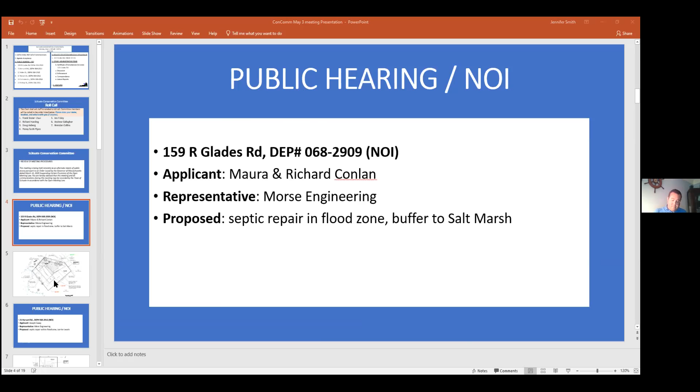So who do we have for that? Greg Morse. Good evening. For the record, this is Gregory Morse, registered engineer, Morse Engineering. I'm representing the property owner and applicant, Maura and Richard Conlan.

This is a septic system upgrade project. The property is located at 159R Glades Road. Looking at the plan here on the screen, the property line is shown as the bold black line. At the bottom left of the screen in blue is highlighted, that's the edge of the salt marsh. The 100-foot buffer zone is the highlighted green line at the top right of the page. You'll notice that the entire lot is within the 100-foot buffer zone to the salt marsh.

It's also in an area of land subject to coastal storm flowage. It's a FEMA zone at elevation 15. For reference, the topography at this site is approximately elevation 8 to elevation 9. There's an existing home at the property. That home is serviced by a septic system behind the house, which failed a Title V inspection.

The proposal here is to put a new system of equal capacity, which is 3 bedrooms capacity, but to locate it in the front yard. This is an advanced treatment system, so it's not just a typical septic tank. This is a Hoot aerobic treatment tank, a pump chamber, and then a geoflow drip dispersal system.

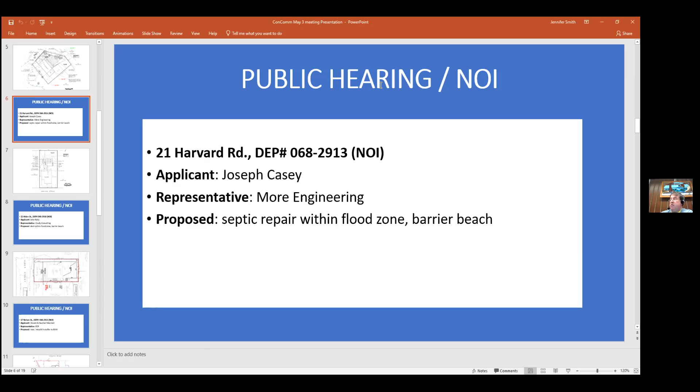Okay, who do we have? Greg again. For the record, Gregory Morse, registered engineer, Morse Engineering. This is a septic system repair project at 21 Harvard Road, located in the Humarock section of town. The property line on this plan is the black bold line. It's approximately a 5,000 square foot lot. At the front of the lot there's an existing 4-bedroom single-family home. Harvard Road is located at the bottom of the page. This property is located in land subject to coastal storm flowage, a FEMA zone elevation 13, and it's also located on the barrier beach.

We're replacing the septic system with a new septic system in the backyard. It consists of a 1,500 gallon septic tank, a distribution box, and a series of infiltrator chambers. This is a 4-bedroom design; it's a 4-bedroom house at the property. It meets all Title V requirements. The Board of Health has not approved this yet, but we expect approval imminently. Where this is located is bare sand, and it would go back in its finished condition as bare sand. There's no vegetation removal associated with this septic system. Turn it over to you.

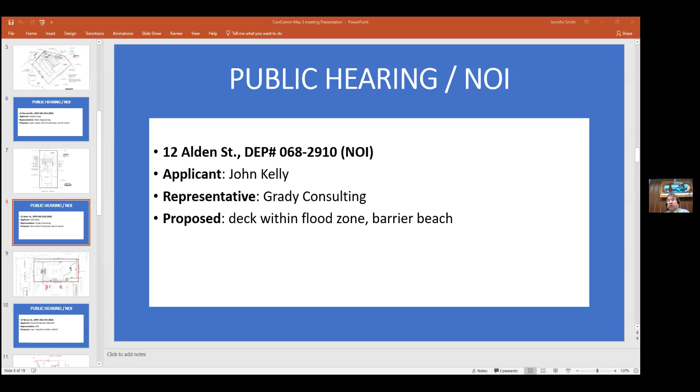I'm here representing the applicants for this proposed deck project located at 12 Alden Street. Currently this site consists of an existing single-family house, with a deck to the front and right-hand side, a septic system and tank in front, and a leaching field in the rear. The site is located in a FEMA flood zone AE elevation 14, and is also located in the barrier beach.

What the applicant would like to do is construct a proposed deck around all four sides of the house and into the rear of the property. The deck consists of 12 concrete precast footings, and we are proposing a silt fence erosion control around the perimeter of the property. I'd be happy to answer any questions the commission may have.

Penny asked if the deck is the big section in the back or the front. It's in the back. She noted they won't have any lawn to mow and said she doesn't have a problem with it, though it takes up the whole lot. Someone noted it's all sand, and that's what they want.

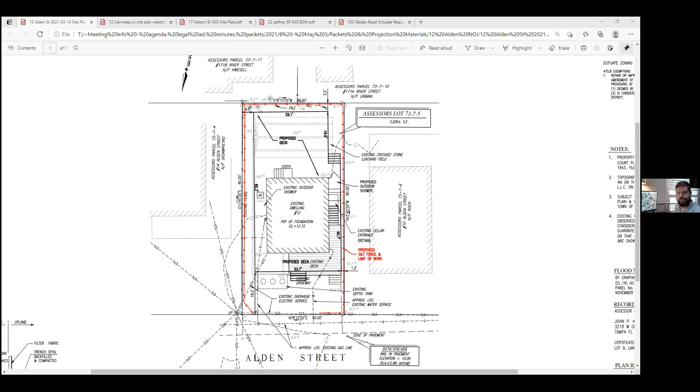Thank you. Number 7, 17 Nelson Street. On May 3rd at 5:30 PM, the Town Hall, Scituate Conservation Commission will hold a wetlands hearing under Chapter 131, Section 40 of Massachusetts General Law and Section 30700 Town Scituate Code of Bylaws regarding the application of Steven and Heather Marshall for work related to razing and rebuilding and associated landscaping of a dwelling at 17 Nelson Street, Scituate. Abutters and other interested parties are invited to attend. Information on access to virtual meetings is available on the posted town website.

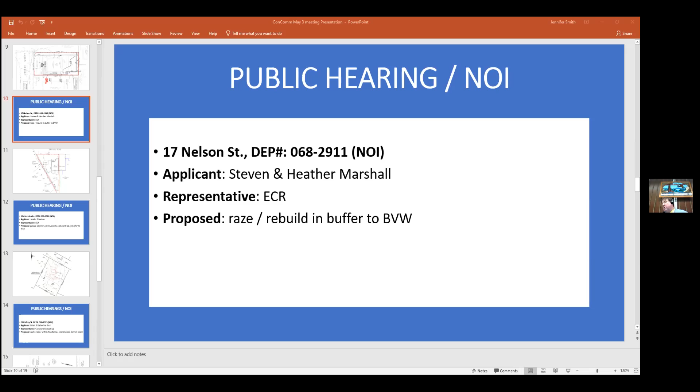Brad Holmes with ECR here for the notice of intent for 17 Nelson Road. A notice has been submitted by Steven and Heather Marshall for their property, which contains a single family home, a maintained yard, and a studio that just received a certificate of compliance. What we're looking to do this evening is a proposed rebuild of the existing single family home, to remove the house and rebuild it in generally the same footprint that exists now.

The work is within the 100-foot buffer zone. A small portion of the work is within the 50-foot buffer zone; however, that is a result of the existing conditions of the house as it stands today. We will install erosion controls to surround the work area, and everything will be located within the buffer zone. Other than that, I'll open it up for your questions.

Okay, thanks. Jen? I had a feeling you were coming this way. It sounds great. I love that it's not getting any bigger.

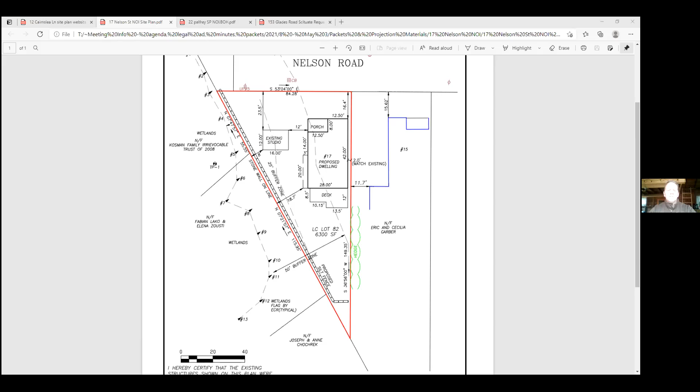On May 3rd, 2021, 5:30 at Town Hall, Scituate Conservation Commission will hold a wetland hearing under Chapter 131, Section 40 of the Massachusetts General Laws, and Section 30700 Town of Scituate Code of Bylaws regarding the application of Jennifer Sheehan for work related to building a garage, addition, decks, and porch dwelling at 12 Cairnslea Lane, Scituate. Abutters and other interested parties are invited to attend. Information to access the virtual meeting will be available on the agenda posted on the town website.

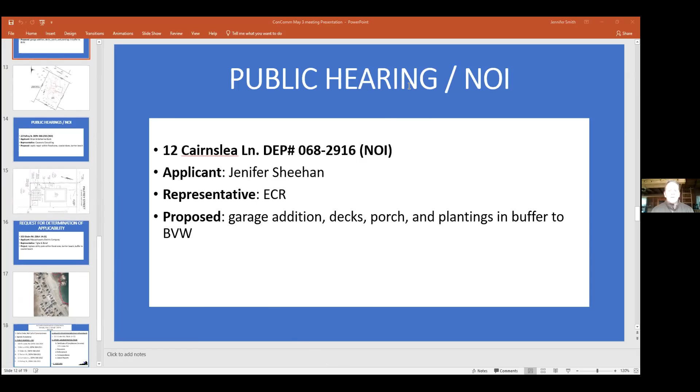Good evening, members of the commission. Brad Holmes with ECR here for Jennifer Sheehan for her property at 12 Cairnslea Lane. We've submitted a notice of intent for a single-family home improvement project. The project involves a proposed garage addition over existing structures, and a proposed deck that would wrap around the back of the house in addition. The work is within the buffer zone bordering vegetative wetlands. We're not within flood zones or other resource areas, so it is within the buffer zone.

The work occurs within existing structures and existing paved driveways and existing lawn. If possible, I'd put together a mitigation plan that might be a little easier for the commission to see the project. But in general, what we're looking to do is work generally over existing structures or paved driveway.

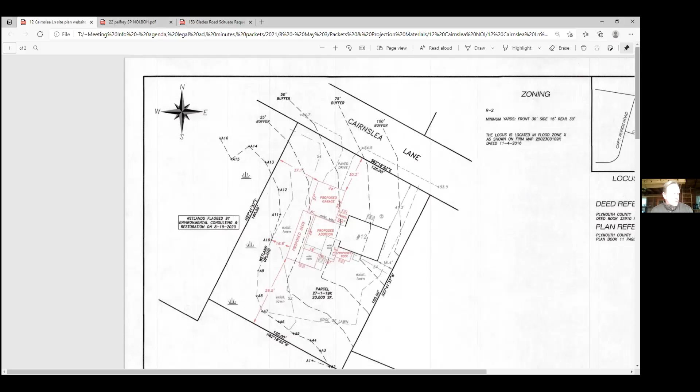There is approximately 660 square feet of deck and garage proposal that's over the existing lawn. So what we're proposing to do is provide mitigation with mitigation plantings at a greater than 1-to-1 ratio, so we'll propose 825 square feet of vegetative buffer to remove lawn.

Well, thank you very much. And revegetate that so that we have a vegetative buffer strip where there really is just maintained lawn. So you can see the area in brown is the shaded area of new project footprint that falls outside of existing structure or driveway. However, it is over an existing lawn. We know the commission looks to require a 50-foot vegetative buffer strip with no work in that area. However, this area is already existing lawn and maintained, so we're proposing the mitigation to revegetate and create a vegetative buffer. That image has a step-by-step process on creating that mitigation plan and proposing a vegetative buffer.

So I'll open it up for questions and discuss further. Okay.

Andy? I don't think I have questions. I get the project, I mean it's significant work in the 50. So I'll let other commissioners weigh in, but I don't have questions. It's a pretty imposing project.

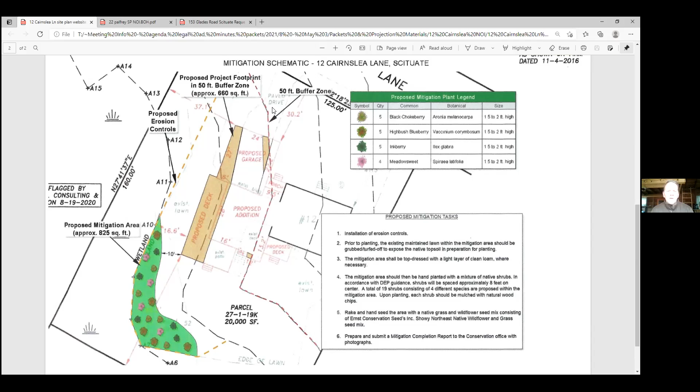Sure, so the access is right from 12 Cairnslea Lane. If you can see how there's a brown strip on either side of the proposed garage, that's the existing driveway leading into the existing garage and house. The proposed garage, majority of it is located over the existing driveway. You can see the slivers that are proposed over lawn. And then an addition would be proposed over the structure that's there. The proposed deck, the shaded in brown, is new structure within your 50-foot buffer zone.

We're looking to mitigate that. If it's a 2-to-1 ratio, we can improve and increase the mitigation area, if that's what the commission would like. I would, and I bet Penny will agree with me. Yes, but other than that, I'm good for now.

Doug: So it's a proposed addition on a full foundation, at least a 4-foot frost wall. There's existing structure there now. Okay, so it's over—that's the addition, the light dotted line is an existing structure. And then in red, you've got the proposed addition that goes over. Correct, so that's going to be ripped down and then you replace that.

So the increase in area is the difference between those two, shaded in brown. Plus the garage - I'm trying to look at two plans. The garage would be new. Well, it looks like, if I'm looking at least, there's a dotted line.

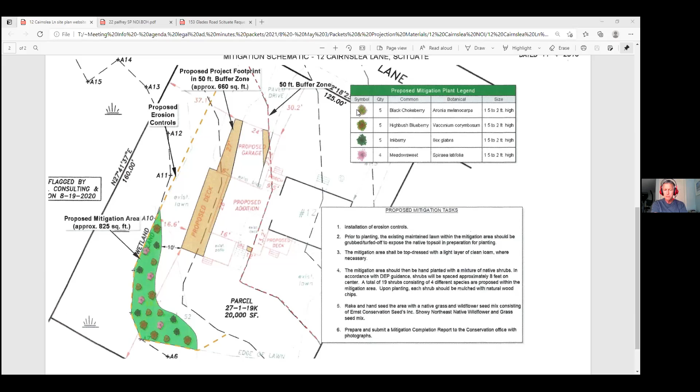Thank you very much, have a good night. You too, thanks Brad. 22 Palfrey Street.

We're down here again. On May 3rd, 2021 at 5:30 PM, the Town Hall Scituate Conservation Commission will hold a wetlands hearing under Chapter 131, Section 40 of the Massachusetts General Laws and Section 30700 of the Town of Scituate Code of Bylaws, regarding the application of Brian and Katherine Koch for work related to a septic repair at a location at 22 Palfrey Street, Scituate. Abutters and other interested parties are invited to attend. Information to access the virtual meeting is available on the agenda posted on the town website.

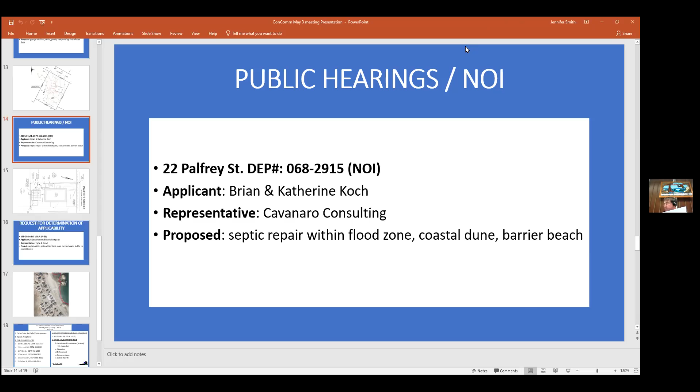Hi Frank, we have Carolyn Reese from Cavanaro on. Good evening, Carolyn. Good evening. For the record, my name is Caroline Reese from Cavanaro Consulting. I'm representing Brian and Katherine Koch, the applicants, and the owners, Seven Seas Realty, for a septic system upgrade.

The lot is located at 22 Palfrey Street in the Humarock neighborhood. The lot area is 3,200 square feet. They propose a repair located in the rear of the lot that's primarily sand, a very sandy area, removing the existing cesspool that has failed and replacing it with a 1,000-gallon septic tank and infiltration chambers. The lot is completely located within Barrier Beach, Coastal Dune, and land subject to coastal storm flowage, at elevation 13. It's also in the Scituate floodplain and watershed protection district.

A silt fence is proposed around the corner of the lot. This plan will be presented to the Board of Health, I believe, next week. Brendan Sullivan will be doing that. At this point, I'd open it to questions, please.

Thank you, thank you, I think we're back to Richard. No, I really don't have any question. I'm assuming the cesspool will be filled in and that the access would be on that side of the house. Most likely, but otherwise no, I know the property and it's needed. Okay.

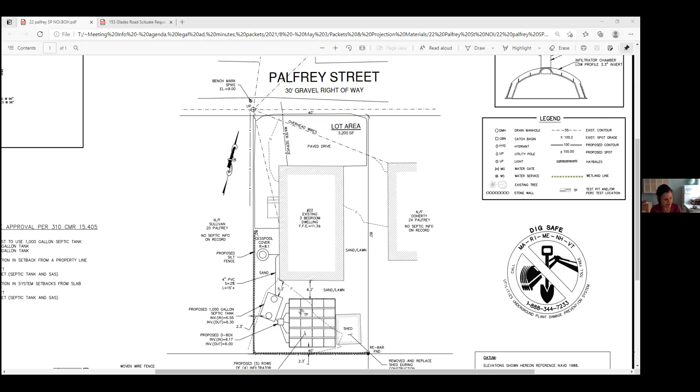Next one's an RDA, 153 Glades Road. On May 3rd, 2021, during the 5:30 PM meeting in Town Hall, the Scituate Conservation Commission will act on the request of Massachusetts Electric Company for a determination of applicability under the Massachusetts Wetlands Protection Act and the Scituate Wetlands Bylaw for activities related to replacing a utility pole at property known as 153 Glades Road, Scituate. Abutters and other interested parties are invited to attend.

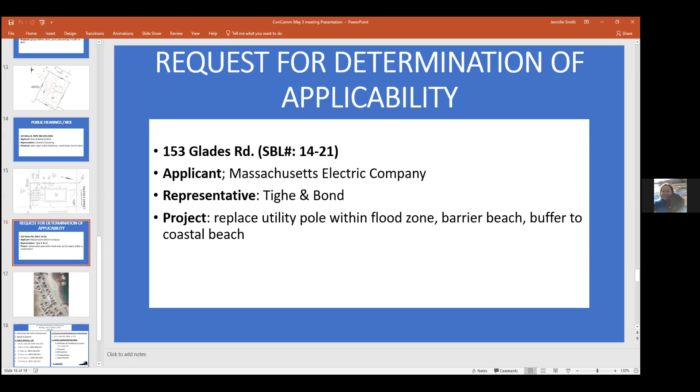I have Jeremy here from Tighe and Bond. Hi, for the record, my name's Jeremy Degler. I'm an environmental scientist at Tighe and Bond, and I'm presenting for Massachusetts Electric Company today. The project, as mentioned, is just going to be the replacement of a single utility pole, an 18-inch pole, at 153 Glades Road. It'll be replaced within the maintained roadway shoulder. We're here today because that pole lies within land subject to coastal storm flowage, and a 100-foot buffer zone to coastal beach. I believe those are the two resources being impacted.

This is a very straightforward project. It's going to be a one-day replacement, restoring pretty much right back to the original condition.

Doug, no questions. Penny, nope, all good. Jen, nope. Andy, good. Brendan, no questions. Richard, good. Amy?

Yeah, so it appears to meet the requirements of a negative finding. Okay, anybody in the audience? I see no hands.

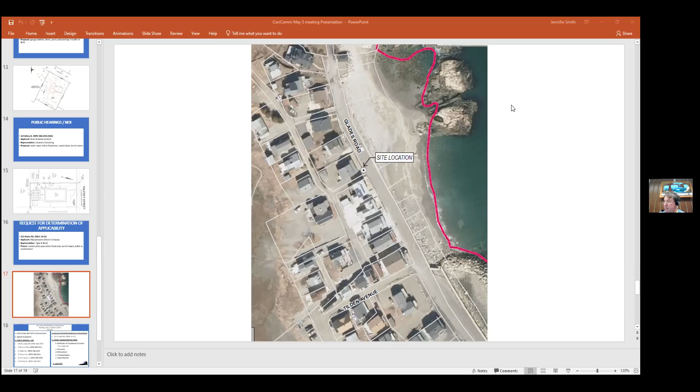Where are we with other items? Frank, this is what I would like to insert. We're on to administrative items.

If it's okay with you guys, I'd like you to make a motion to issue orders for all the NOIs that you heard tonight. They're all pretty straightforward, and we just have a huge backlog, and it would be very helpful to get these going and get them out the door. I mean, it's not that they're going to necessarily, I mean, you'll see them before they go out, you know what I'm saying, but if we could just vote to accept them, they're largely septics and a few others with a couple of special conditions. So I think we can do that if you're good with that, guys. So what would happen with, say, Cairnslea?

Well, we will not issue that one until we receive the revised plan. So you could do all but Cairnslea, you could do 5 of the 6. And we could maybe shelve Cairnslea till June 8th, and I'm sure they'll have the plan in by then.

We closed it, didn't we? Well, we closed it, she just wants to issue the orders. Okay, so you'll issue. Yeah, it's closed pending receipt of revised plan.